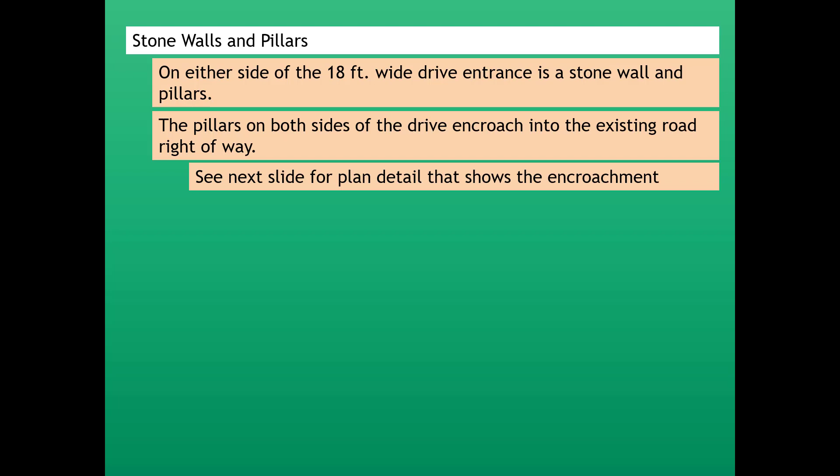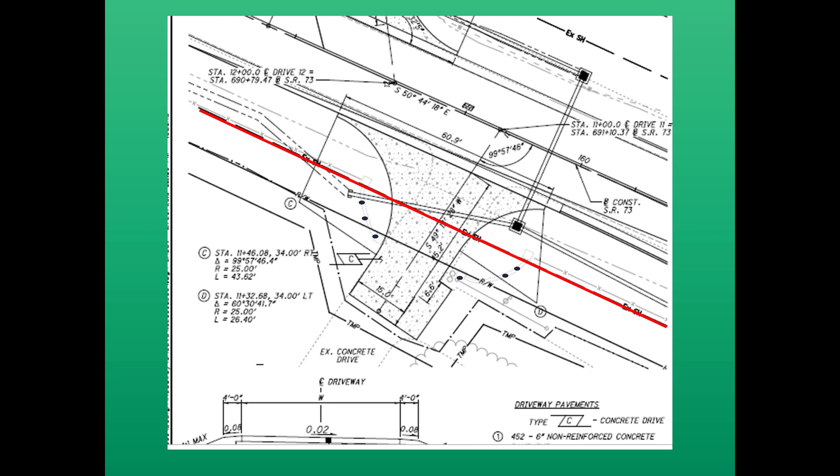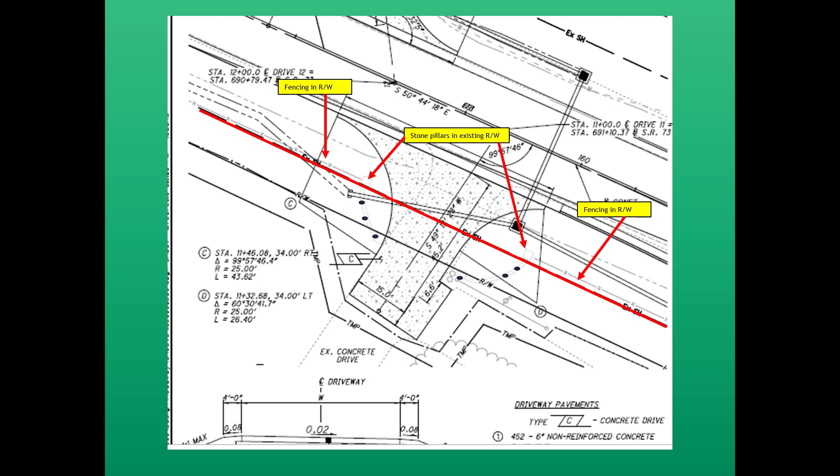See the next slide for a detail that shows that encroachment. Here's the detail sheet of the drive, and that solid red line is existing road right of way. There's a red arrow showing fencing that encroaches into the right of way, and other red arrows showing the two stone pillars that encroach into the right of way.

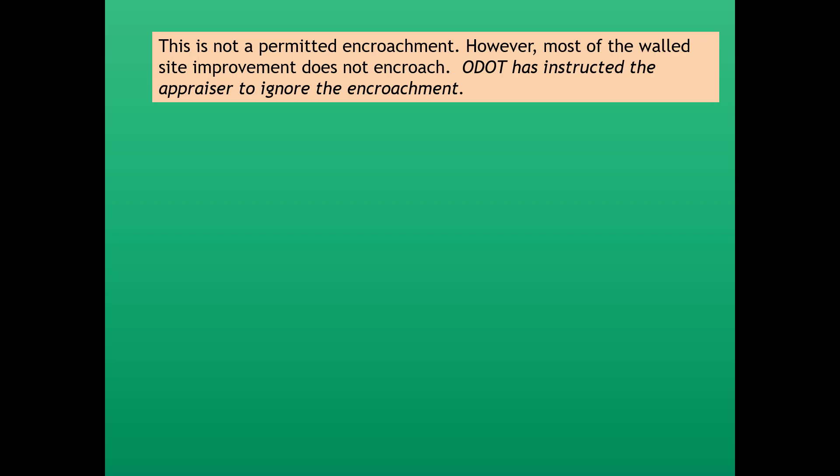Again, this is not a permitted encroachment. However, most of the walled site improvement does not encroach. ODOT has instructed the appraiser to ignore the encroachment. For this appraisal, the encroachment is ignored and compensation will be paid. The contributory value of the walled site improvement is estimated using the Marshall Valuation Cost Service, section 56, page 7.

From that, we estimated there's 162 cubic feet in the walls and pillars, and the cost per cubic foot is $60, giving a replacement cost new of $9,720. We modified that to reflect the caps on the pillars: 6 cubic feet times $83 a cubic foot gives a replacement cost new for the caps of $498, and we total those to get a total cost new of...

$10,218. Again, they're in pretty good condition, but they're not new, so we've depreciated them 10%, which indicates an estimated contributory value of the stone walls and pillars of $9,196. Next, we're going to talk about the metal gate that's attached to the pillars, also at the entrance drive.

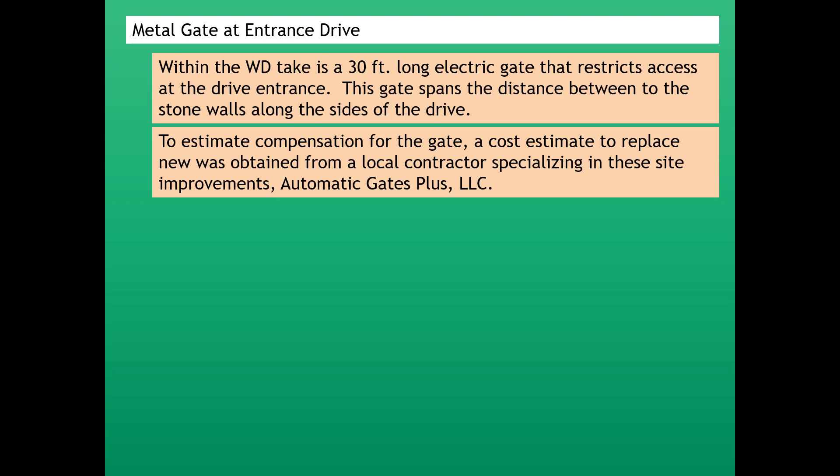Within the 30 WD area is a 30-foot long electric gate that restricts access at the drive entrance. The gate spans the distance between the stone walls along the sides of the drive. To estimate compensation for the gate, a cost estimate to replace new was obtained from Automatic Gates Plus LLC, the same people that gave us the cost estimate for the fence.

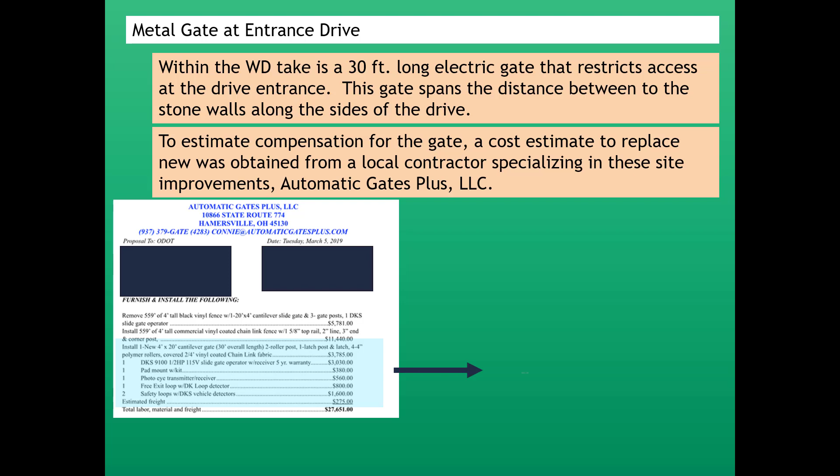There's that cost estimate, and we've highlighted in blue the portion of the estimate for the gate. That cost new is $10,430. So we've depreciated the gate at 10%, which gives us a contributory value of the gate of...

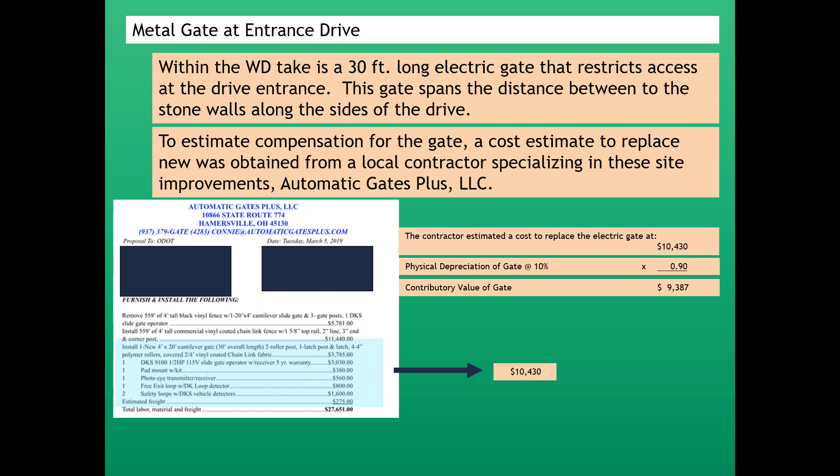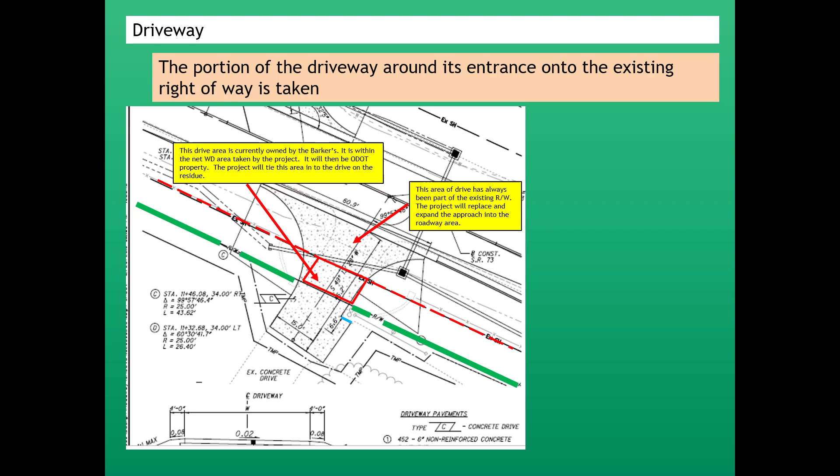The project will tie this area into the drive on the residue. And the residue, you can see the area in blue that we've just drawn in. This drive on the residue is replaced with new concrete as part of the project, so we're not going to pay for that either.

The total concrete area of the drive is about 2,700 square feet. The area that the owner loses is outlined in red. It's approximately 20 feet plus or minus wide, 10 feet deep, as part of the net WD taking. This area lost by the owner to ODOT contains 200 square feet.

So the yard site improvement section of the Marshall and Swift valuation service was again used to estimate the cost per square foot to replace the entire concrete drive. This unit value will be applied to the area taken and is part of the larger drive area. That unit value was $4.56 a square foot, applied to the drive taken, which is 200 square feet, gives us a reproduction cost new of $912.

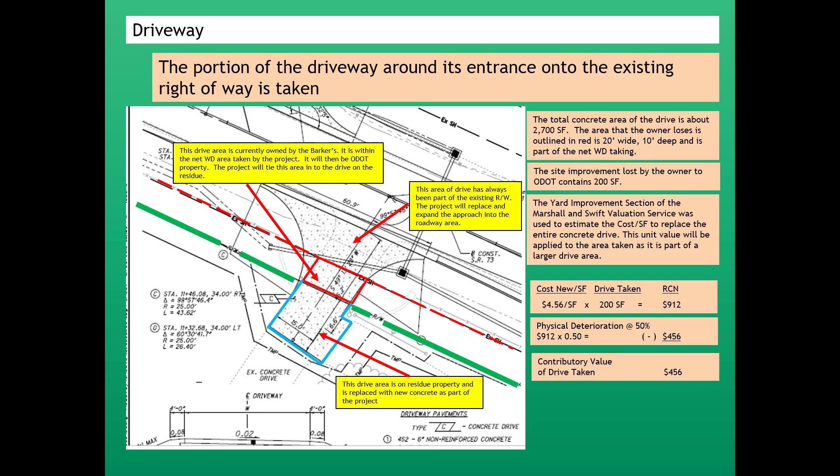That drive, if you remember from the pictures, is cracked all over the place, and we've estimated a physical deterioration of 50%. So we've depreciated that drive 50%, or $456, which leaves us $456 as the contributory value of the drive taken.

So let's talk about the trees taken. There's 5 trees taken within the WD area. 2 of these trees are large and located at the entrance drive. 3 of the trees are smaller and are located between the drive and the easterly property line.

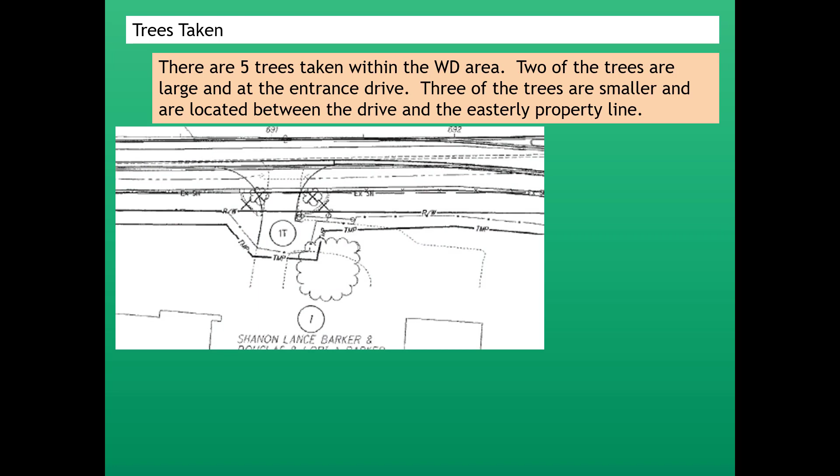So what we're now doing is drawing in the drive entrance, and you can see that there are 2 larger trees at the entrance of the drive. We've shown them on the plan sheet, and we're also showing you from a Google Earth photo.

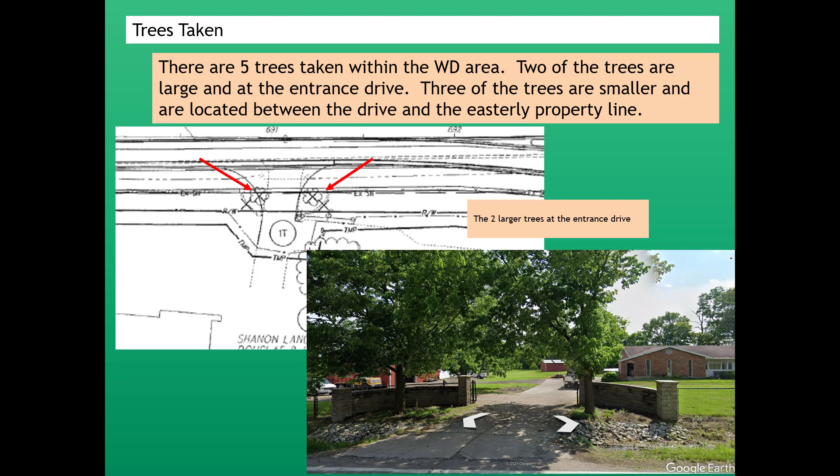The 3 smaller trees west of the drive entrance, here's 2 of them. You can see they're on the other side of the fence into the property, and that portion of the fence is not in existing right-of-way. Not shown, and they weren't shown on the plan.

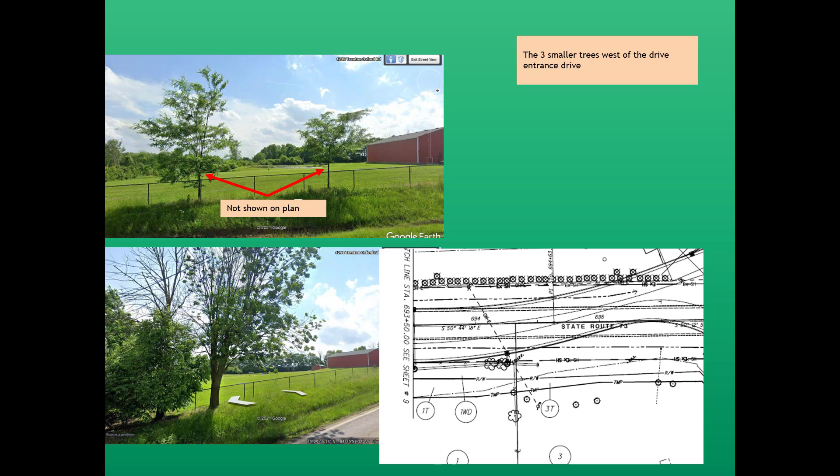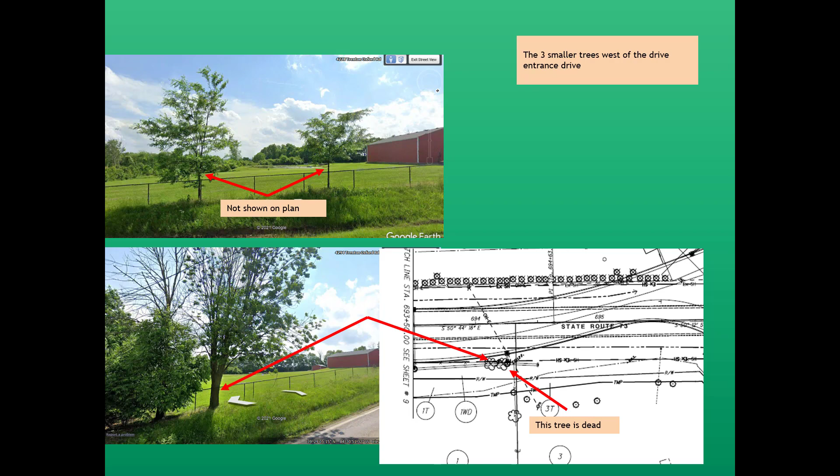And then towards the end of the property, you can see that there are 2 trees that will be taken, but one of those trees is dead. You can see from the photo here. So we're not going to pay for that. We will pay for the other tree.

Compensation for the trees is based on their contributory value to the whole. The 2 larger trees at the drive have an estimated value of $1,940 each, and the 3 medium-sized trees have an estimated value of $710 each.

So the larger trees, 2 times $1,940, equals $3,880. Medium-sized trees, 3 of them at $710, equals $2,130, which gives us total compensation for the trees that are taken of $6,010.

So here's a summary of the site improvements that are taken. Got 519 feet of fencing taken at $9,562. You've got the stone walled entry at $9,196. You've got the entry gate taken at $9,387. Concrete drive taken within the net WD area of $456.

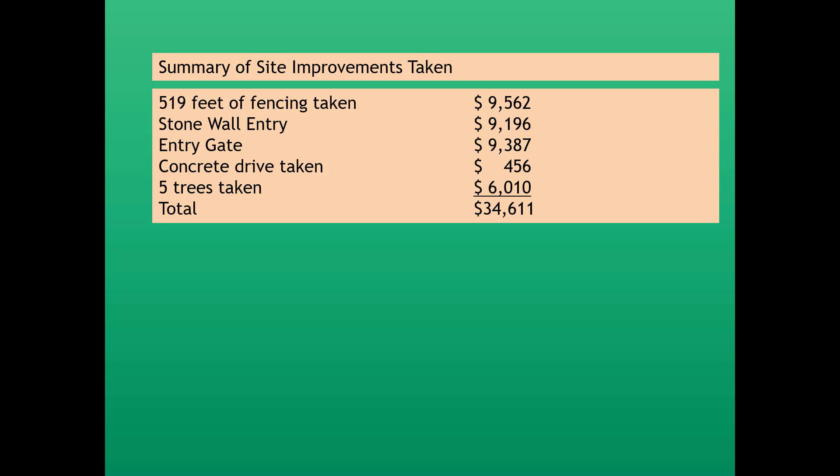And the 5 trees that are taken at $6,010. The total is $34,611. It's time for another knowledge check.